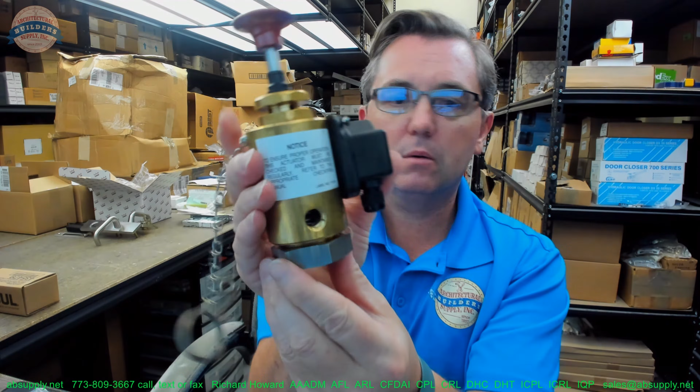Here's the majority of the components anyway. And we have the installation instructions linked down below.

Connecting cable. This is the pad device itself, the actuating unit. Includes that, a connector, and of course a label as well. So this is what's obviously going to allow you to immediately activate a unit.

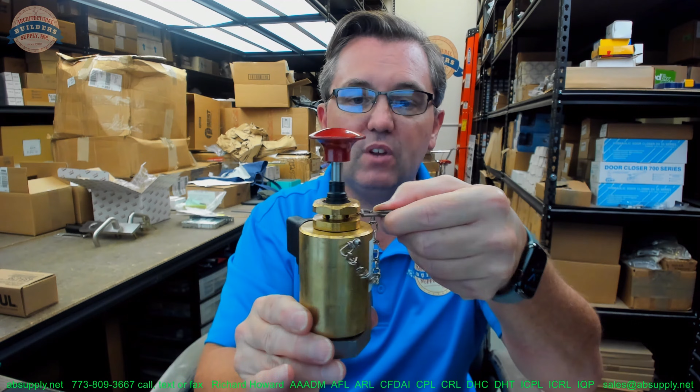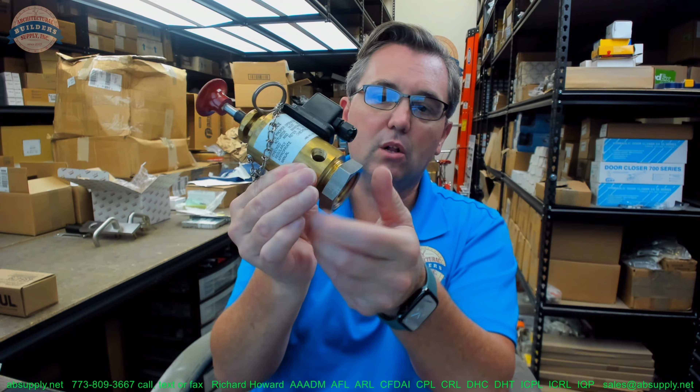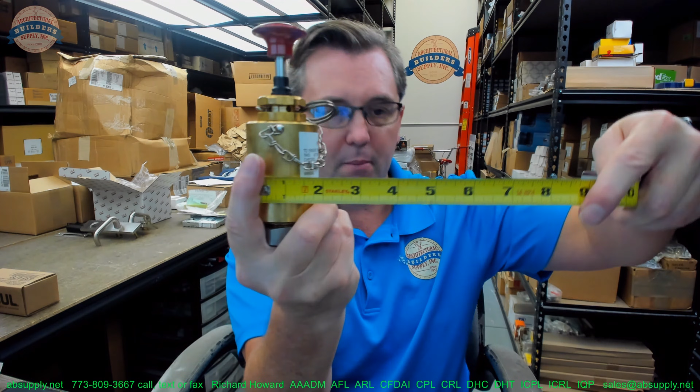Has a safety ring, obviously. Weighs about 3.27 pounds. The nut is included as well, down below. Overall height of the unit, just to give you a sense of its size, about 6 inches. Body diameter looks like it's about 1.75 inches or so.

Let's switch to the screen view and take a closer look at not only the unit but the installation instructions as well. We'll just go over the top level category, so to speak, about working on it.

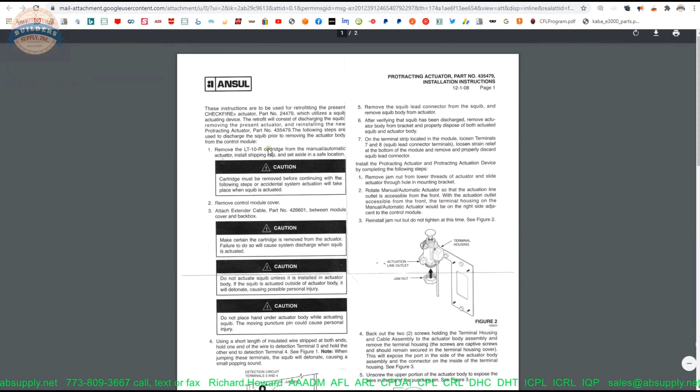Okay, so here's the item that we are looking at, the protracting pad or protracting actuation device. There is a link below this video to the installation instructions, so let's go over that quickly.

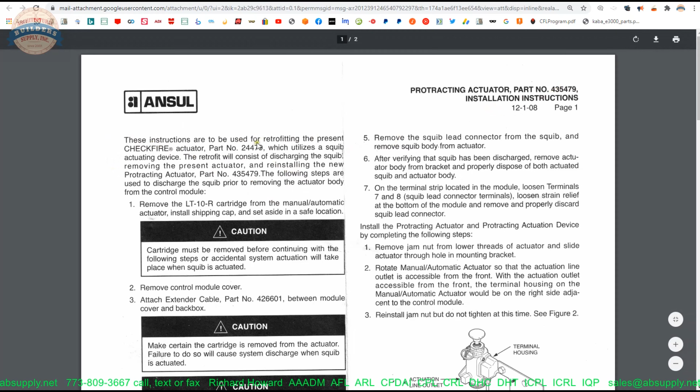The first section, the first half of the first page, talks about bleeding or discharging the squib. This is when you are retrofitting. You're going to use a 435479 when you're going to retrofit the existing 24479, which utilizes the squib. You're going to need to bleed that, and you're going to need to do so in these steps.

Remove the cartridge. Remove the control module cover. Attach the extender cable between the module cover and back box. All of these cautions here need to be read and understood. You can unintentionally fire the system and have it also detonate, which they tell you is something you'll certainly want to avoid.

Using a short length of insulated wire stripped at both ends, hold one end of the wire to terminal 3, and to 3 and 4. You'll hear a small popping sound causing the squib to detonate when you short that.

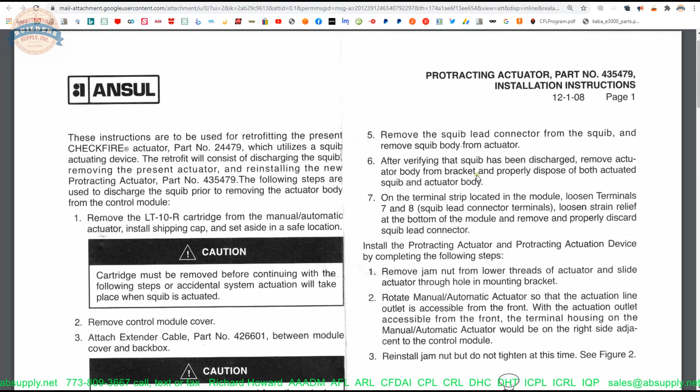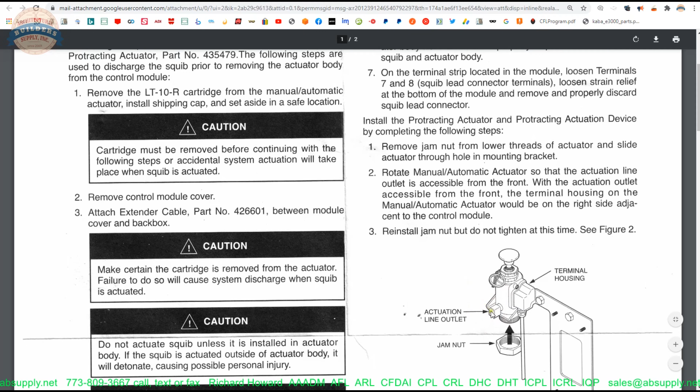Now, once you have all of the first 7 steps completed, install the protracting actuation device by following these steps. The jam nut, which I showed you earlier, is connected to the bottom of the unit. Rotate the actuator so that the actuation line outlet is accessible from the front. There will be a large hole that's tapped, and you've got that connector that I had shown earlier.

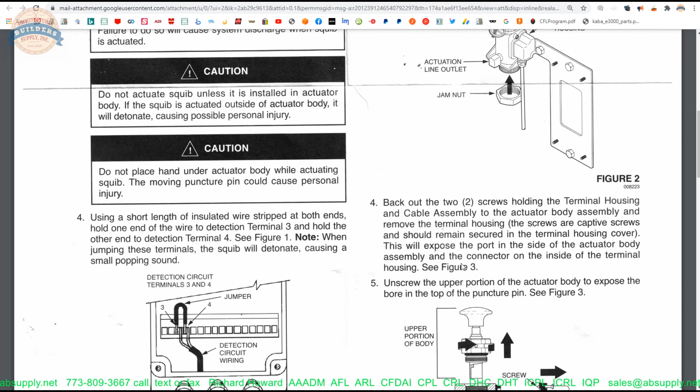Back out the 2 screws that are holding the terminal housing, which is this. That will expose the port in the side of the actuator body assembly and the connector on the inside of the terminal housing. So the terminal housing is going to have your connecting cable, which is part number 436114, and then it will look like this. So there's going to be the cable that's in here, which is 436114.

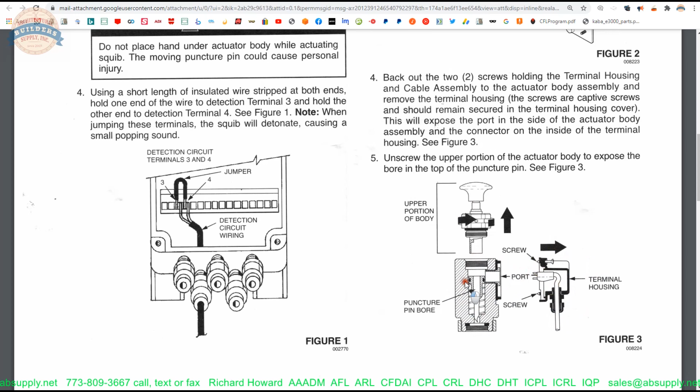You'll fish that through here after you remove the terminal housing. Then your actual pad is going to go inside of here, and the two will connect. That's going to be shown here. So you'll install the protracting actuation device.

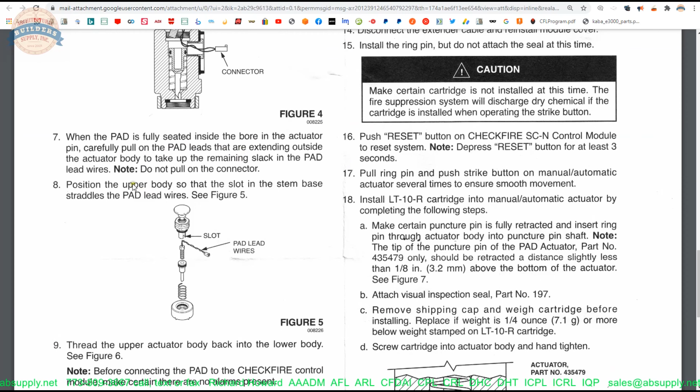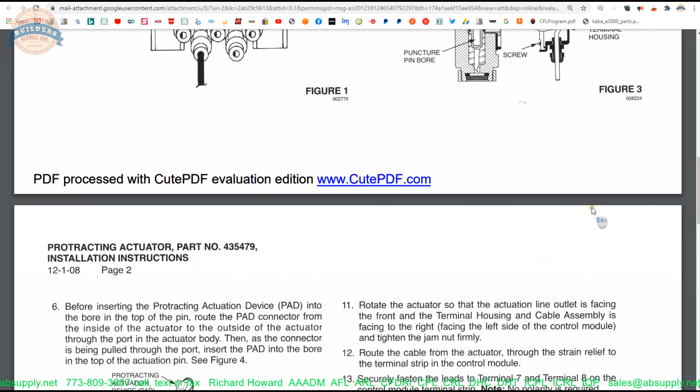When it's fully seated inside the bore in the actuator pin, carefully pull on the pad leads that are extending outside of the actuator body, and you'll access that by unthreading the top portion here. You'll remove this to gain access here.

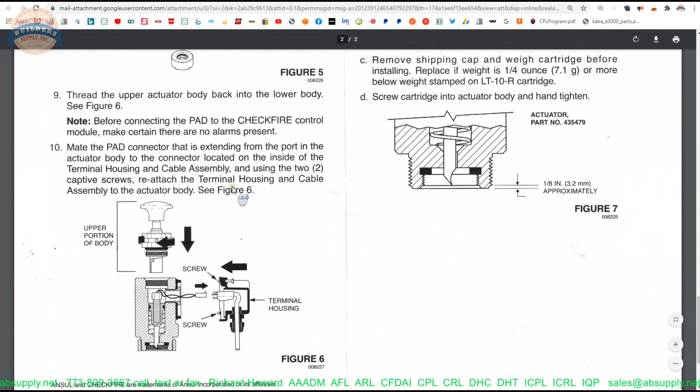Your connector will come out. You're going to connect the two items together, obviously. Reattach your terminal housing. That's a very brief summary of what will happen with this. So you'll need to obviously review this step by step, but a summary of understanding the parts is presented by going through the installation instructions.

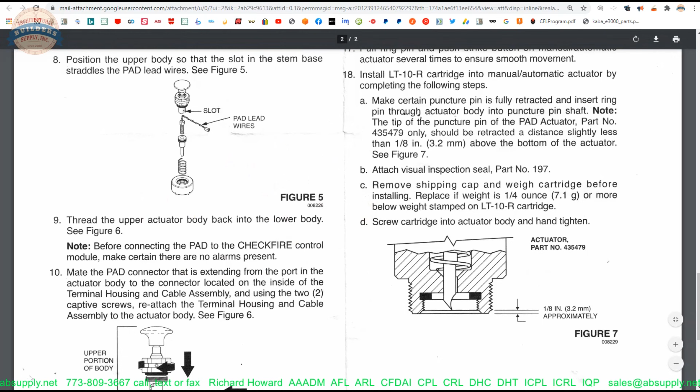Let's wrap up this video on camera.

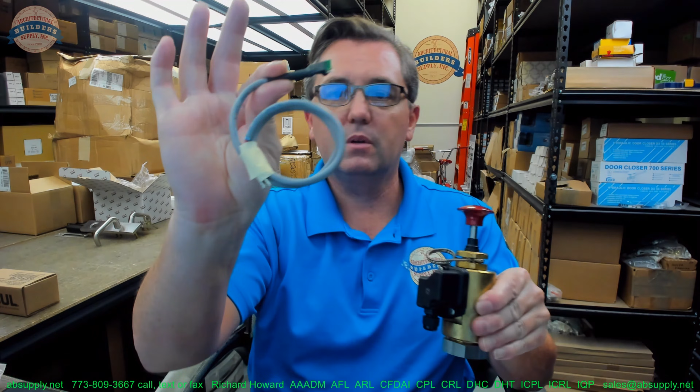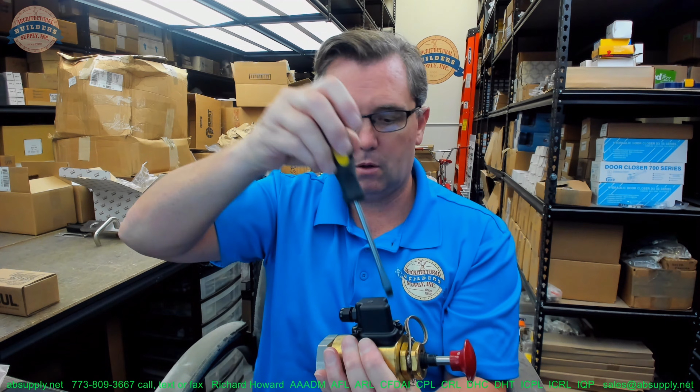Okay, so the cable that's going to come through the housing is here. And you'll just loosen these two screws, and I'm going to do so now. I have them mostly removed.

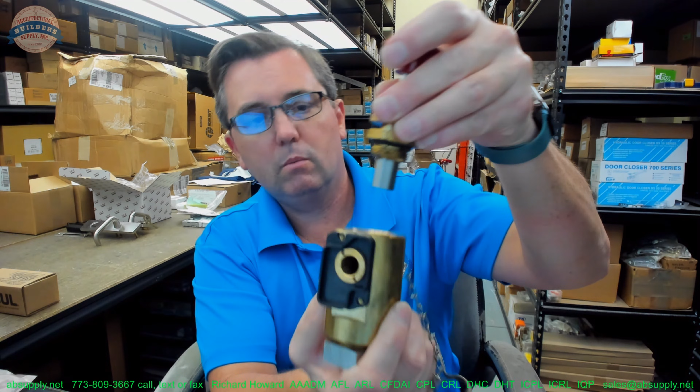And the only thing that's really left in here is the striking component and then the spring. So that's what popped a little bit. Okay, it's seated down in there where it belongs. See it coming out right there.

Your pad will go down and in. Your wires will come, after the pad goes down, the wires will come out this side. They're going to connect inside of the terminal housing where this wire is coming through. Okay, they obviously connect together.

And you have your threaded housing connector. That was the last component. Actually, no, the last component is, of course, the decal. And the decal literally comes right at the end of the installation instructions. Attach visual inspection seal, part number 197.